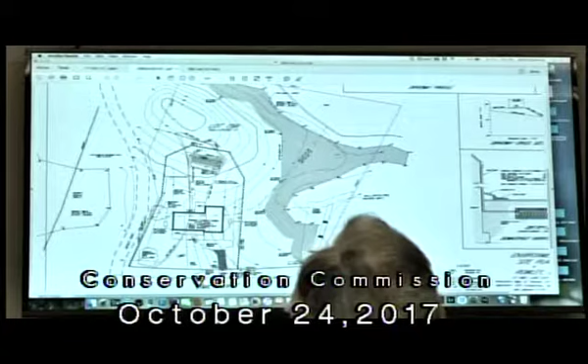John, does that work on the upper one? No, it doesn't. No, it doesn't. Yeah. No, red laser light disappears into the pixels on the thing.

And stormwater roof runoff will be discharged into StormTech chambers at each end of the dwelling, on the right side there and on the left side. The septic system's been approved, it's a Presby system, and it's outside the 100-foot buffer zone as the local Board of Health regulations require.

The driveway will be pitched so no runoff will occur onto Emily Lane. And during construction, we're going to have a construction pad along there as shown to prevent any silt from washing out onto Emily Lane.

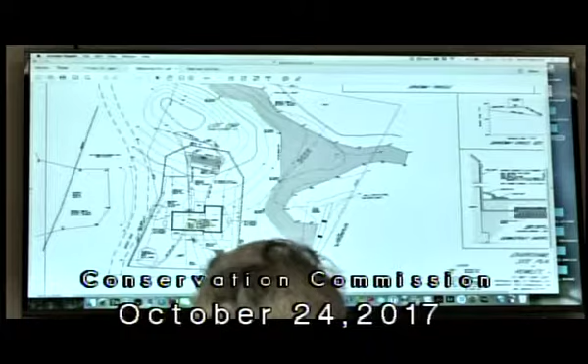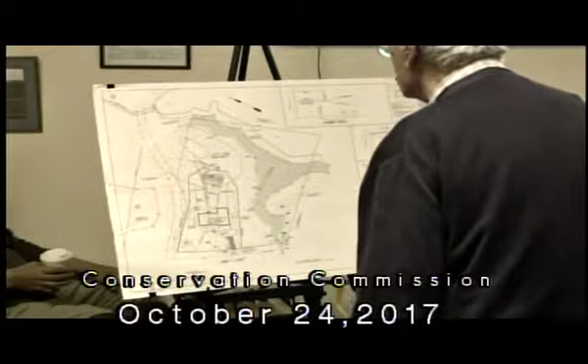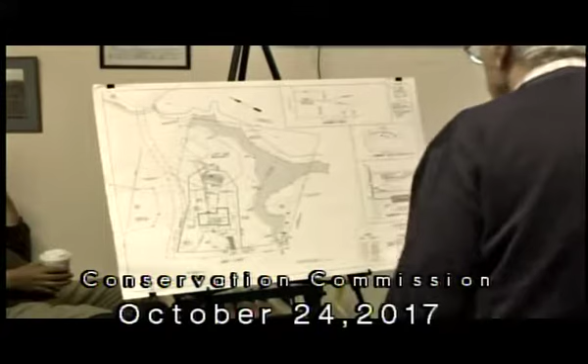There are two wetlands adjacent to the site. One is on the left side, to the left of an old woods road that runs out back, and another wetland is over on the right side. We're 100 feet from there, within the 100-foot buffer zone. I'd be glad to answer any questions.

Did I miss it? Did you introduce another interested party that's with you this evening? Yeah, Dan Davison, the applicant, is here. Okay.

All right, usually at this time I address Brent, and then we talk on that. Yes, so just to review for the commission, the Emily Lane subdivision was consummated in, I think, the early 2000s. I'm not sure exactly when the project finished, but it finished, what, 2006, maybe 2007, in terms of getting a certificate of compliance.

So John has already mentioned, in terms of the field visit I conducted with Greg Bernard, for some reason there is collapsed silt fence a fairly significant distance into the lot. I'm not sure what its purpose was, or why it goes towards and into the bordering vegetated wetlands. This is a wetlands flag right here, and this is the collapsed silt fence heading on, and take my word for it, that it crosses the delineated BVW line.

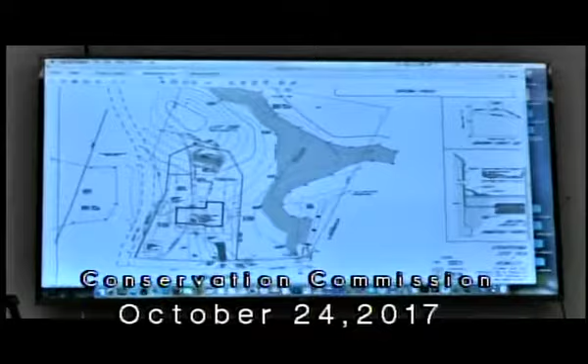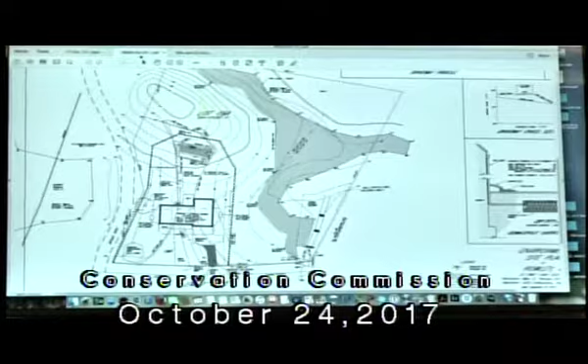The symbol for the 100-foot buffer zone to BVW and for the BVW itself is unfortunately the same thing, a dashed red line. We'd really like to see a differential there. It's okay if the color scheme is the same, but there should be a definite different use of symbology to show that, because that's the edge of our jurisdiction. The 100-foot buffer zone to bordering vegetated wetlands is our regulated area and is a regulated resource area under our bylaw, so it should be differentiated from the delineation of the bordering vegetated wetlands, just to be clear.

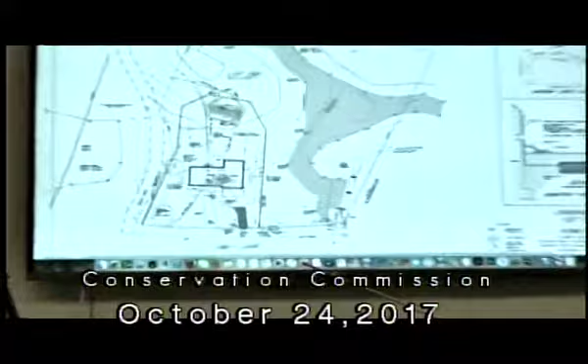Now, the isolated vegetated wetlands is off property, so I guess it's okay, but again, you may want to use a different symbology for that, because technically that's different from the edge of the boundary of the 100-foot buffer zone to BVW, and different from the edge of bordering vegetated wetlands. Just so there isn't any confusion, since someone might get confused where we've got three different things with the exact same color and symbol utilized for it.

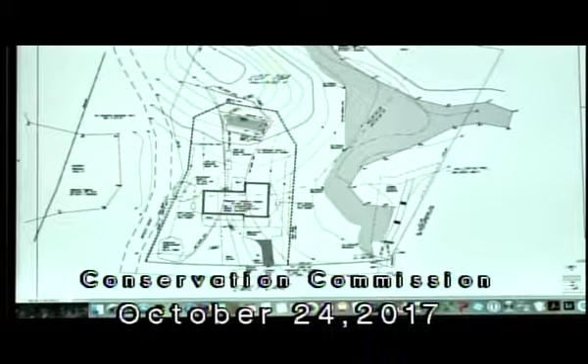I would also recommend, since the plan sheet seems to have a fair amount of active white space, that we do not have any depiction of the erosion control, and we do not have a detail of the erosion control. We really should have a detail, especially showing how the ends of wattles or filter sock need to be parallel and not overlap by going on top, but going side by side, and then being appropriately staked. So I recommend inserting a detail specifying the erosion control.

One question I have for you, since you were talking about the driveway and you do show a profile of it, but I was unclear as to which way the driveway is pitching. You do not provide an elevation of Emily Lane. I assume, from walking the site and looking at the contours, that the driveway slopes down, and then I'm not sure if it slopes up a bit to meet the level of the garage, which was at an elevation of, what, 60-something I think.

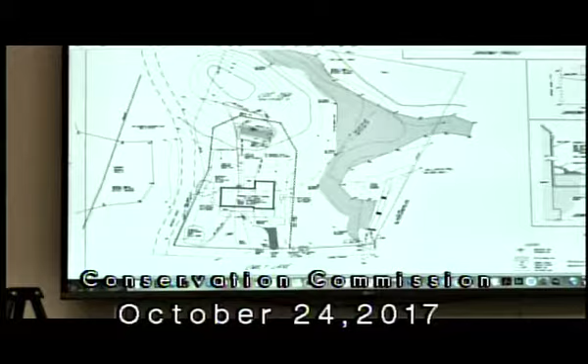So is the driveway going to pitch away into the front yard, in the opposite direction from the regulated wetland resource area? Or is it going to shed water towards the bordering vegetated wetlands? Or was it just going to be level so that it went off to either side and therefore did not concentrate?

That would be our intent, to make it level. Well, my concern is that it comes down from both the dwelling and from the roadway, so there's going to be a point there, unless you do careful grading and spread out a level section, where it's going to concentrate and shed stormwater to either side. Especially if it pulls any water off of Emily Lane, we're going to get concentrated stormwater flow to either side of that driveway right in their front yard. Well, then we'll have to pitch it to the left.

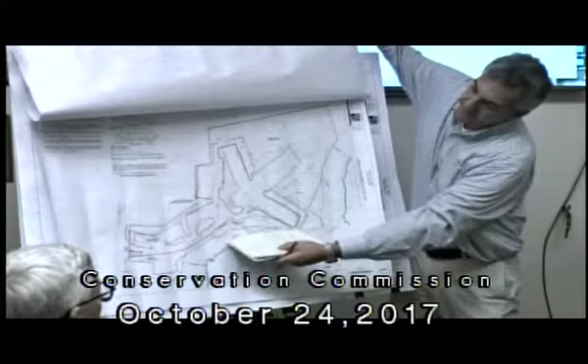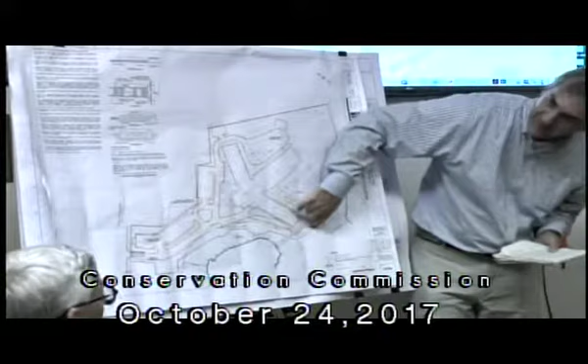The pink on this is the existing pavement, so I just want to draw your eye down to here. This is almost like the service wing, and that's where we're losing a lot of the existing pavement. We have a decrease of 3,700 square feet in the buffer zone, so you can see this gets much narrower. I was a little shaky doing this here. It's not actually that thin, but it's a steady, I think, 14 feet through here. And then we pick up the bus loop.

So just to go over some of the numbers, it's an 8.5 acre parcel. North Environmental flagged it for us last December when we were beginning the survey and beginning the planning for the project. This flows eventually into the wetland here, which then goes into a vernal pool, which is farther into the woods, Ox pasture. Oh, wait, no, this goes to the salt marsh, Egypt River, and then eventually into the Egypt River, then combines with the Rowley, a little far off.

We have an increase in site impervious of 0.3 acres or 16,000 square feet. Again, essentially, it's the bus loop, and actually a decent amount of that number, 5,000 square feet almost, is the conversion of gravel parking to impervious. So it's areas that are already seeing traffic that are just getting paved. Buffer zone alterations, we just included the whole area from the buffer zone on the site that was being altered, but it's a little under an acre, it's 25,000 square feet, but with a 3,700 square foot decrease in impervious area.

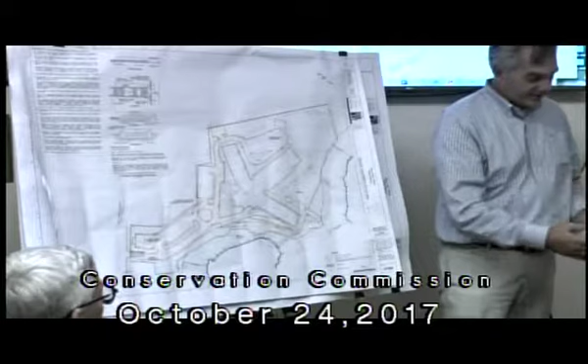And I don't expect you to be able to see in detail all the work that we're doing here, but just to show the order of magnitude, and I can put it on the board if you care to see it, that we're doing for the site work, really relating to bringing the site stormwater up to compliance standards. Generally, we're picking up in new catch basins with deep sumps and hoods, sending the flows from those through the water quality structures to get our 80%, and then infiltrating them. Overflows from the infiltration then will discharge.

There's 3 existing outlets just upstream from the wetlands that we are going to reuse. On all 3 of them, we're going to redo aprons, redo the riprap at them. If they had them before, they've filled in by now, and just to address velocities and pick up any sediments that might make its way through the treatment train. One of them is being replaced in its entirety because it's kind of missing. The other ones, the head walls are there, and they're substantial. Again, just re-dig out where the outlet is and put in new aprons for them.

We have, on the site, new structure, just to orientate you, existing basketball court, that stays as is. The driveway moves a little bit closer. And I think it's a little bit clearer on where I highlighted it, just to kind of see the flow. So parking, parking, parking. Bus loop, kind of like a parent loop, so they don't have to go up and through, just to bring a little bit more order.

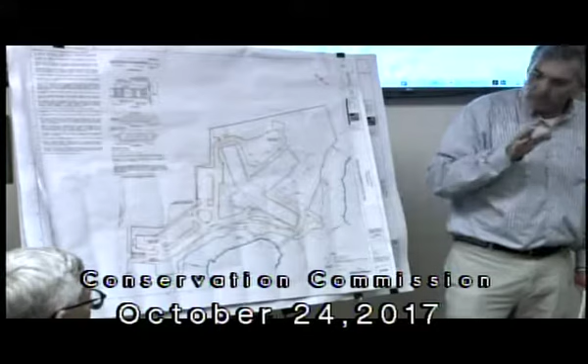This pavement back here is walkway emergency access. And that's why we have a little hammerhead up back here, so the fire department doesn't have to try to back out the entire way. That was requested by the fire department. Yeah. A good idea.

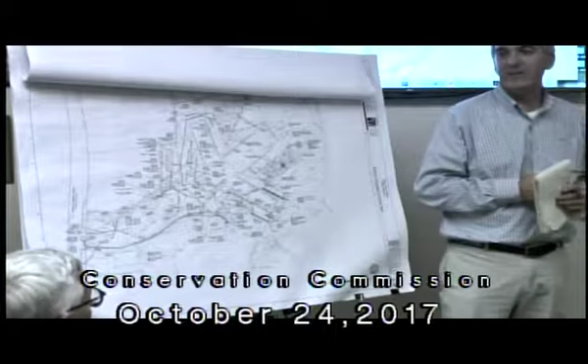New playground. Most of the structures for the septic system are being reused. After inspecting them and ensuring that they're still in good shape and in sufficient quality, the septic tanks will be reused. We're going to add 2 new pump chambers, and then reconstruct the disposal field under a reconstructed baseball field in the same location where the baseball field is now. And then we'll abandon the 2 that are there. Right now, the school's on two separate ones, so we're gonna combine them into one field.

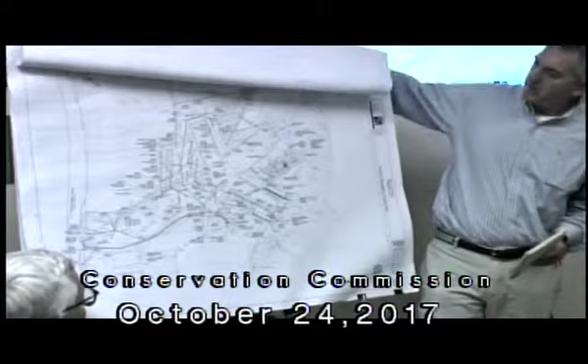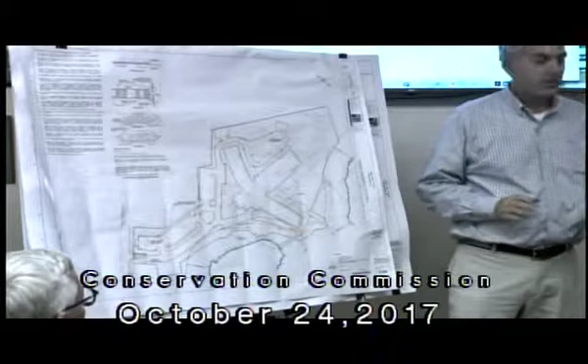And the only other, since we are here, part of your bylaw does address erosion control during construction. It's gonna be a phased project, so we're gonna do it over 2 years. The exact work that will be done in which particular phase hasn't been all decided. I could go through that, but- Oh, I'd be interested to hear that.

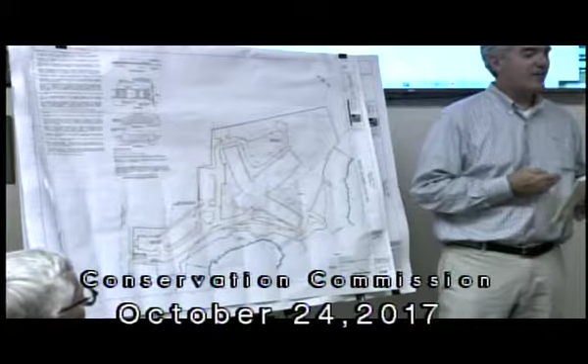In any event, the site will be surrounded by not only work fence, but also erosion control. When we're doing most of the site work, there'll be stabilized construction entrances. Most of the site work, I imagine, will not be done when the children are there. Site work will be very focused on the 2 summers, summer of 2018 and summer of 2019. So that gives us a good opportunity to secure the site for erosion, not have students, staff there, and let them do the work.

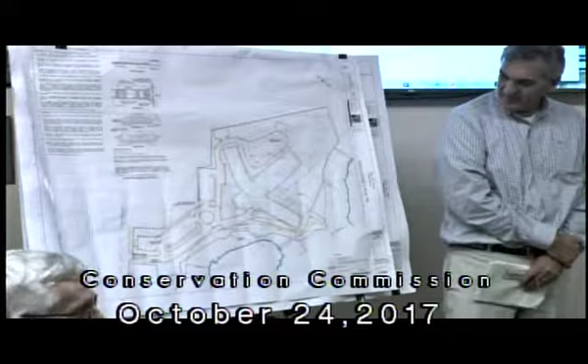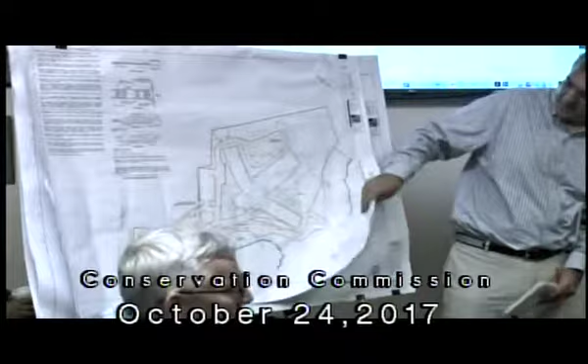We need to get that in place, but that kind of power, utility, tel data connections with Comcast and Verizon, that's the real focus of the site work first summer, because they have to do all the work inside related to that, building a new electric room, new boiler room, in time for the fall. Right. So the current thought is most of the site work, the drainage structures, ball fields, leaching field would be summer of 2019.

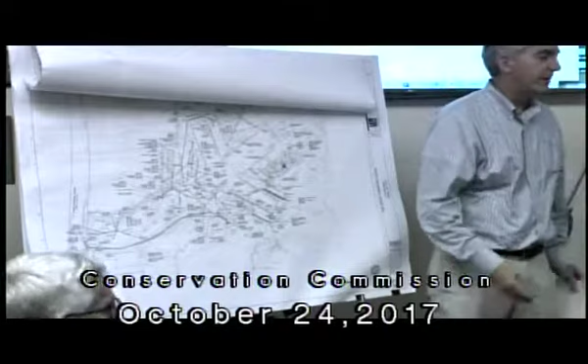Would it be safe to say anything that we do in the first summer of 2018, we would be left with like a stabilized site when we come back in the winter? Yes. So either landscaped areas would be seeded, or we'd at least put down pavement patch on areas, it's gonna be a school for a year, and we kind of leave it like that.

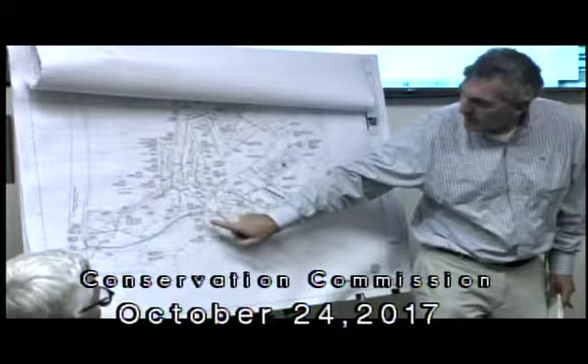A couple things you would trip over if you're actually out there in a couple of years that I want to point out, as John mentioned, would be the transformer. Yeah, that's the under. The transformer, which is right here, and the emergency generator, which is right here. We're gonna put low earthen berms on the 3 sides of those. Both are double walled, and they'll be protected by bollards, but just in case anything ever was to happen, we would not have direct flows into the wetlands.

What that lets you do is then dig up the dirt that has seen the oil, get it out of there. And I believe Raleigh Power said their transformer fluid is actually bio-based. Yeah, all the transformer fluids are vegetable oil now, and they don't have the PCBs they used to have. Yep. And the diesel generator with a belly tank, but again, both would be protected with bollards. I can go over particular numbers or questions. Just the generator, is it diesel? Yes. It's diesel, okay, right.

And at this time I'd like to turn it over to Mr. Baselak. Well, so actually, this is sort of the take 2 on this particular application, and we understand the town has procured the services of the technical reviewing agent for the planning board, H.L. Graham, who communicated to us today that they have not initiated the review. Mm-hmm. So we're kind of waiting for that. We still have the notice of intent application, and maybe we should just wait until we get into that one to talk about DEP's comments.

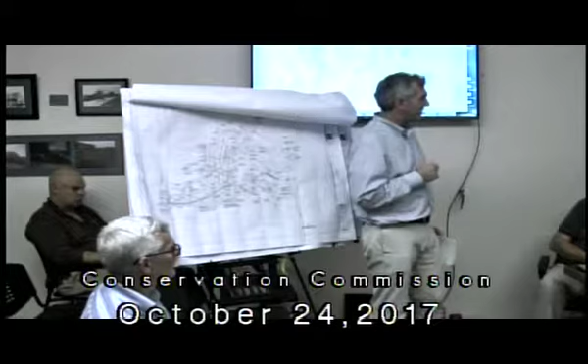Sure. They were rather succinct and easily addressed. Right. Yeah, we don't need to muddy the waters. Do you need us to request a continuance? Yes. Is verbal okay? It certainly is. All right. Do you want a date certain, or just when we get the comments? Well, I believe we are going to work positively here, and I'm going to recommend the commission just continue it to their next meeting in 3 weeks. Okay. So we'll just request that.

The reviewers said they anticipated having some comments out by the end of next week. So we believe that would allow an approximate week and a half to two week period to respond to those. So we'll request a continuance for this particular hearing until your next meeting, November

14th. I thought you folks did a great job in addressing stormwater. Well, we'll see, we don't have his comments. Well, right, I know. In my view, I didn't see a complex situation here that was necessarily going to engender a lot of substantive comments. Now, we'll see whether my positive attitude is going to bear fruit. Yeah, you just jinxed it.

Like they say. And just to remind folks, obviously we're interested in doing a good job and getting through the process and not taking up too much of your time. But it's a public bid job, so what we're really interested in is understanding anything that needs to go into these bid documents before they go out, so that we're not dealing with any changes after we get bids. We like to put the order conditions in our bid documents. Yes, and so if you're responsible for it, flag it.

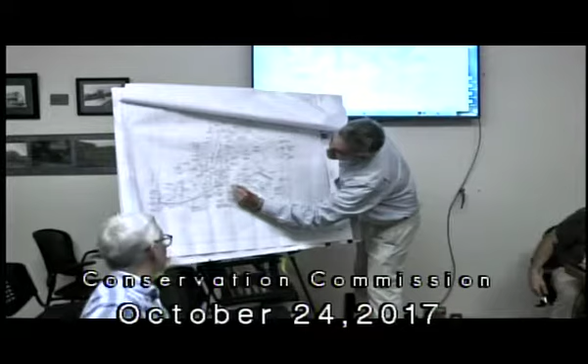We have received DEP comments regarding the plan. The DEP comments pertain to the water quality inlets that we are showing. It's a publicly bid job, so I can't put the Stormceptor Model 450 on the plans. But the comment was valid, they are Stormceptor 450s. They haven't gone through their testing program to show that they meet the 80% TSS removal. So what we're proposing to do, and I circled them, is this structure, this structure, this structure, and that structure. Those are catch basins that act like small Stormceptors.

So what I believe we would propose to do is to turn those back into regular catch basins, have them go to a water quality inlet, similar to what we're doing elsewhere on the site, and then connect them back into the system for discharge. The only trade-off is we would lose infiltration here and here, which we don't particularly need to meet any of our requirements. It's just me as an engineer.

I like to try to infiltrate wherever I can cheaply, and this building doesn't have a basement. So what you're seeing here was really just a carrier pipe, actually this one came off your suggestion, a perforated carrier pipe in crushed stone so that we could leach some off. So I'll look for another opportunity for that somewhere else, because I do like spreading it out throughout the site.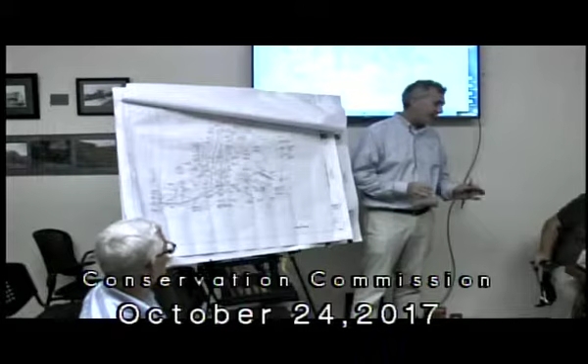Even just making those catch basins into water quality inlets, we're going from 4 fairly expensive structures to 4 cheaper structures with 2 more expensive. So it's not really much of a trade-off in cost, I believe, if at all. It depends if I can get the infiltration back in or not. So that's the direction I was going to head.

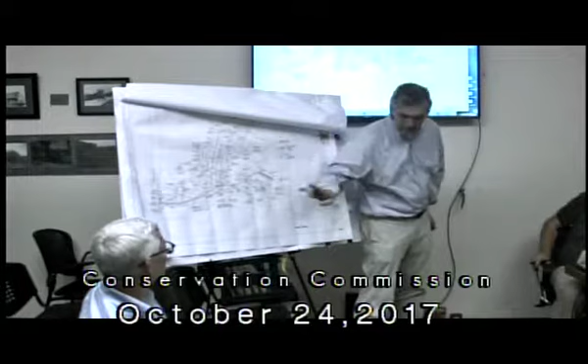I probably wouldn't mind, however you want to handle it as far as dealing with the peer reviewer, get their opinion. And these pavements, we shared that comment with them, so I believe it would be succinct to also share yours. These ones, I would say they need to be made right, because these are in high traffic areas. Actually, go this way real quick. Right in the parking areas, right? These other 2 are in low

areas where we're not expected to see traffic, but honestly, if you plow them and sand and salt the hell out of it, then maybe we do make it like the other one and just do it right, and we might end up losing a little infiltration, but again, we're over our numbers, so we'll still be good as far as stormwater guidelines.

Do you feel you'll have this for the next meeting also? What's that? Well, this is kind of dependent upon the H.L. Graham review and what type of commentary goes back. I'm sort of suggesting that preemptively, since we got that DEP comment, to deal with that, share and then push to H.L. Graham Associates what appears to be the appropriate response, so that maybe that would just grease the wheels of their review instead of just waiting for the ping-pong match to go. Yeah, that's a good point.

And towns do it differently. I've actually been a reviewer for 20-something years in a different town. Generally the thought is you don't want to see us together until we are all good with H.L. Graham. We don't do dueling consultants in the public hearings, right? Make it right. The next time you see us, you have a letter from them saying they're okay with it. Sky's blue. No, it's indigo.

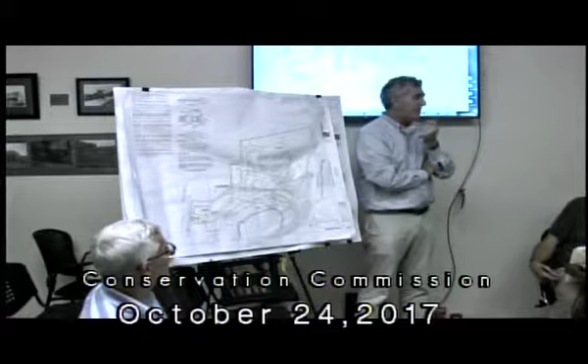But as professionals, we don't mind if there is a discussion, because we realize that sometimes there are different options to get to the same end result. So if we come to something like that, we'll come. But generally, if it's something we can address, we won't have to bother you. Do you have any questions?

I was going to say, the only other comment that I've had some experience in is always keeping in mind that a municipal facility is then the responsibility of municipal care and maintenance. So if we have a choice between the Cuisinart and the Black & Decker coffee maker, we're probably going to want the Black & Decker coffee maker and not necessarily the Cuisinart.

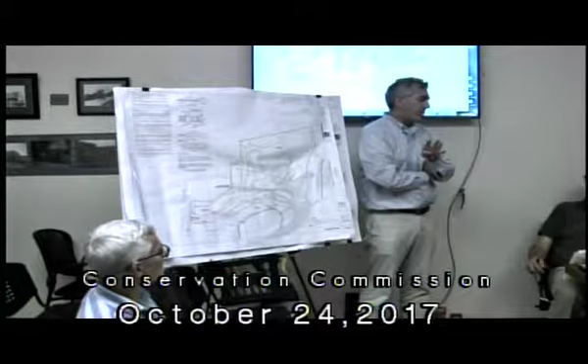Right, and so what I was suggesting too, as far as making the catch basins and adding 2 water quality structures, is you go from 4 structures that you really have to pay for down to 2. You should be cleaning and maintaining all of them, but it's a municipality, so I understand. There's some that need more TLC, and we'd reduce that from 4 to 2. So I was thinking about it both ways, and on the drive up, I was like, I like the forever kind of solution.

Any questions from the audience? We need to request that this gets continued. Okay. Do I hear a motion? So moved. Second. All in favor? Aye. Aye. Continued to November 14th. Thank you.

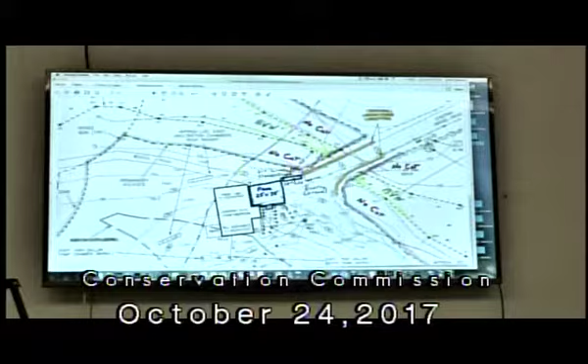And the dimension would be added to that also. Well, yeah, I would add a description that says allows a paved apron 25 feet wide, 30 feet, with the armored crushed stone swale. I can even reference it back to the sketch in our file if you want me to do that, but I would think that would be overkill. Yeah, no, I think that's a good way to handle it.

It's gonna silt up in about 10 years. Oh, yeah. Which is why I said you could just shovel it out and you can wash it. Unless they clean it out, it's gonna go bad. But even if it silts up, the drainage will be larger. It's still gonna armor that section and not allow a gully, believe it or not, for 20 years.

It's eroded and dug down. It'll take 20 years, but pine and grass needles will grow faster than anything. You made a French drain, and it'll work for that, quite a while.

I agree with it, the only thing is that type of thing goes bad over time. Unless you put a berm, the first plow truck would hit it. So what else could you do? Well, this is off to the edge, on the side. You could not pave there.

And you have to remember, the interest is not necessarily in it being a filter strip. The interest is in it being a hardened surface that is resistant to sheet flow, starting to gully, sediment, the smaller gravel material that's there. It's really just meant to be sort of a hardened strip.

Armored is the term, unless it's pavement. Are you afraid that's gonna cause you more water than you're getting now, that would have flowed over there? Packed gravel.